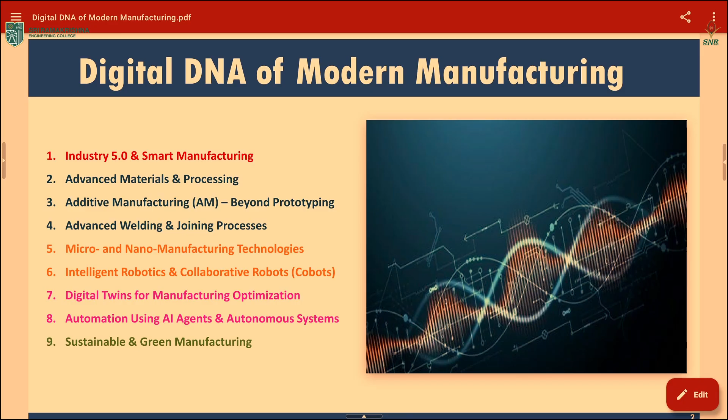Have you ever wondered what makes a modern factory think, learn, evolve, just like a living organism? Is there an idea to understand? Today, every smart factory has a digital DNA, a unique combination that defines how it senses, decides, acts and improves. Let's decode this digital DNA.

We had the evolution from steam power where factories were muscular but not intelligent, everything dependent on human hands. In stage 2, the electrical power stage, mass production began. Machines became faster but still blind and deaf.

In stage 3 we added a brain, and machines could be programmed, but they could not yet feel the real world. Then came Industry 4.0, where you had cyber physical systems - machines with sensors, connectivity and intelligence. They started to feel the temperature, vibrations, quality deviations and send this information digitally.

How many of us use smart watches? This is a personal cyber physical system - your body, sensors and the cloud. This is the same logic that industry uses for machines.

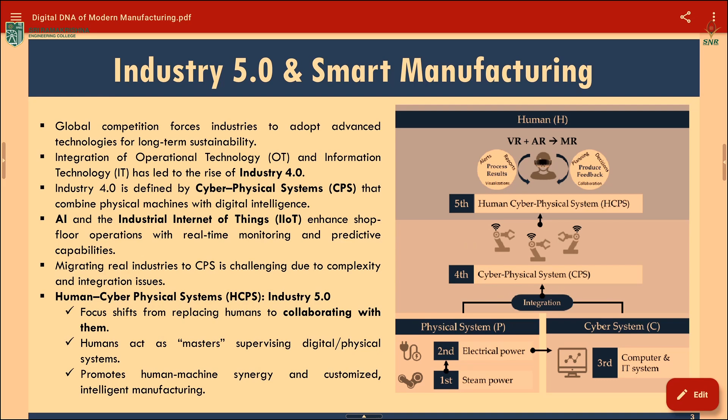As a part of this digital DNA in modern manufacturing, materials play a more vital role. Now imagine a world where materials do not just get discovered - they get predicted, simulated and optimized before they are ever made.

A world where the computer becomes a co-scientist, designing alloys atom by atom, predicting failure before it happens, and selecting the best process routes with zero trial and error. This is the power of AI influence in advanced material processing, where materials grow a digital brain.

So why do we need advanced materials? They operate at multiple scales: macroscopic level, microstructure, nanostructure, and atomic level. Traditionally, understanding and designing the process across these scales took months of expensive trials, with high probability of failure. But AI reduces this to hours, sometimes even minutes, by learning patterns which humans cannot see.

So normally the top-down approach or bottom-up approach is the story here. You start from the bulk material, refine the microstructure, and tune the process. That is an example for the heat treatment of steel.

Whereas if it is a bottom-up approach, you start with atoms, build molecules, form nanostructures, and then go for the material, such as graphene assembly and nanoparticle synthesis. Here AI acts as a translator between these two worlds, predicting how atom level changes influence microstructure and final properties.

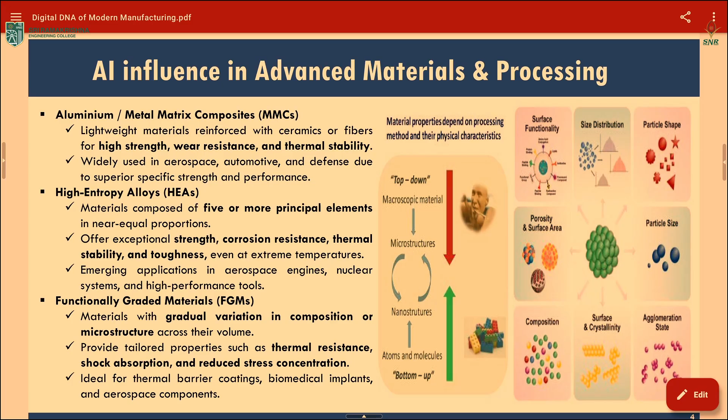As we start with the materials, we wanted to deep dive into the next generation of manufacturing, which is the most trending topic: additive manufacturing. It is no longer just rapid prototyping; nowadays it is called additive manufacturing, and it is no more just a prototyping thing.

Now, because of the advent of AI and technological development, AI has influenced this additive manufacturing process also, and modern additive manufacturing is used not just for prototypes but also for functional parts, toolings, repair and low volume production. This enables complex geometries, customization and rapid design iterations.

Now I wanted to concentrate on 3 most important metal additive 3D printing processes: selective laser melting, directed energy deposition, and electron beam melting. These are the three processes I have just listed, which are the current scope of the trend, so you can concentrate more on these topics.

The third one is what you call a special process, the hybrid additive manufacturing machining system, which combines 3D printing and CNC machining together to form a single machine, offering near net shape precision finishing with high accuracy, reduced lead time and less wastage. These are all the processes available with respect to additive manufacturing.

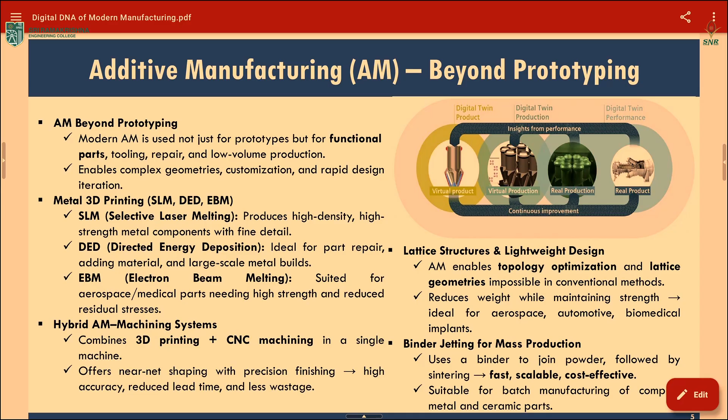Additive manufacturing also enables topology optimization and lattice geometries which are not possible in conventional manufacturing methods. This also reduces the weight of the product while maintaining strength, making it more ideal for advanced applications like aerospace, automotive and biomedical implants.

But what happens if we are using digital welding, using sensing and AI getting influence into it? You will be having real-time monitoring of arc characteristics, temperature and weld bead geometry, how it is being designed, and then how you could be optimizing these weld bead geometries and its characteristics.

And you will be having an AI model which could predict the weld quality and what defects are going to happen, and you can automatically adjust all these parameters, which normally enhances the consistency and reduces the rework. So this mostly avoids the task of a human being, right?

So a welding inspector or inspection agencies can get a digital DNA of how the weld is being produced. Because of welding automation, you will have all the data like when it was welded, what would be the chemical composition of the material, what parameters have been used, and whether any defects have been introduced onto the weldments. All these things can easily be read by the digital DNA of the welding process.

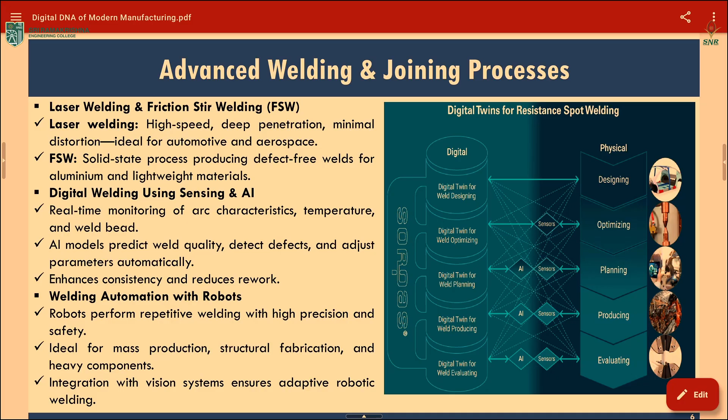We have seen the most important advantages of all the materials processing like additive manufacturing and also welding. So these are all very important in the manufacturing arena. So even these are all the process.

But what happens, how we can develop some autonomous AI agents in the factory environment, where you will be having a customer service which acts as an AI agent. So you will be having IT services as an AI agent, and for sales you can have an AI agent, and for product management you can also have an AI agent, and for purchasing and planning you can also have an AI agent, and also for shop floor you can have an AI agent.

So all these things are going to act as autonomous systems, where the AI agents could be used for all the production scheduling tasks and autonomous inspection systems, and also for intelligent decision making in factories. This could analyze data from machines, tools and sensors to make operational decisions, and this is also going to support predictive maintenance, quality improvement and energy optimization.

This forms the backbone of self-learning and self-optimizing factories in the near future.

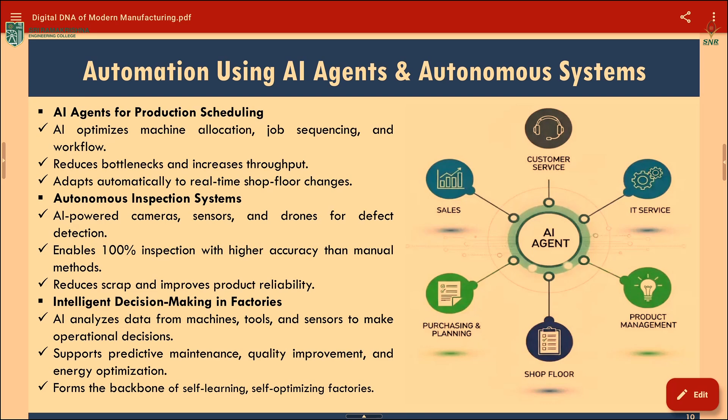Even though we talk about the modern trend in manufacturing of all the processes, right, so we are more concerned about sustainable and green manufacturing. Sustainability is one of the most important key topics where the whole world is looking after. So in this sustainability we have three important aspects to be discussed.

That is, low carbon manufacturing techniques, where you have the adaptation of renewable energy sources. You need to develop more renewable energy resources with low emission materials and processes to reduce the carbon footprint. And whatever materials we are using should have a closed loop manufacturing system that could recover, refurbish and reuse these materials.

So advanced separation, sorting and reprocessing technologies have to be developed for whatever process we develop, and this could promote a circular economy and reduce the dependency on virgin raw materials.

And the third one is, even though we do advanced manufacturing, we need to have an energy efficient manufacturing system where you have high efficiency machines, motors and smart energy management systems. Here you can have real time monitoring to reduce energy loss and improve utilization.

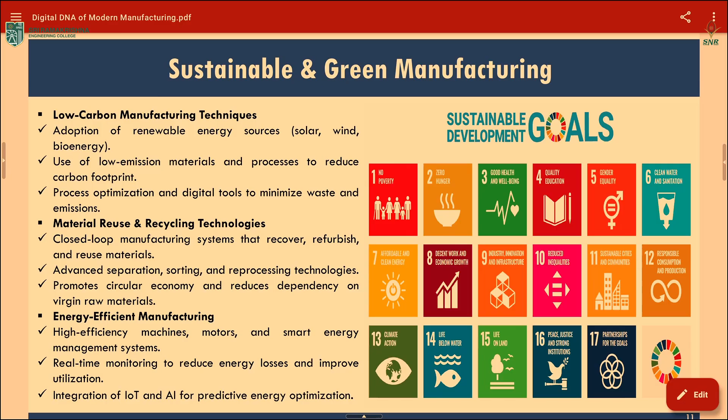So here the integration of IoT and AI in predictive energy optimization could help us achieve the sustainable and green manufacturing goals.

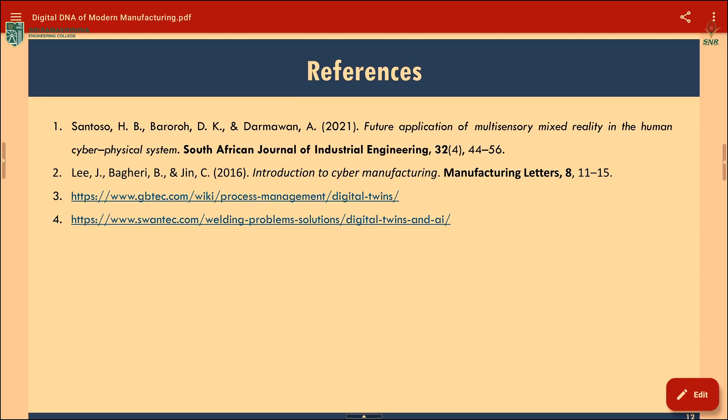In future factories, humans will not be controlling the machines. AI agents are going to control the machines, coordinate the process and even the human workers, creating a very good manufacturing ecosystem that is effortless to the human beings.